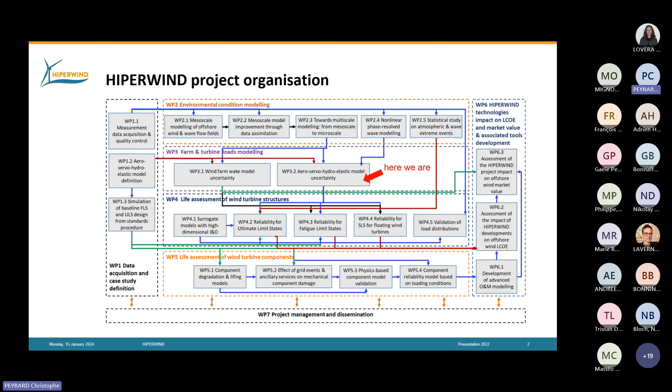On my side, I'm going to talk about several components of the uncertainty we can have on the wave loads applied on monopiles. My global idea is to focus on the DEL, the damage equivalent load, rather than the ultimate load, so the study will be very fatigue-specific. I'm going to talk about three main sources of uncertainty.

The first one is about the geometry of the monopiles, because we have the transition piece that makes the connection between the pile and the turbine, and usually this piece has a larger diameter than the pile itself. This can introduce geometrical variations that will change the loads, especially considering the hypotheses made in the design models.

Then I will briefly talk about the nonlinear loads applied on monopiles, focusing on the high frequency loads that are most involved in fatigue, because they correspond to a lot of cycles. And then I will give a brief word about the stretching models, which are one of the sources of uncertainty in the loadings on monopiles.

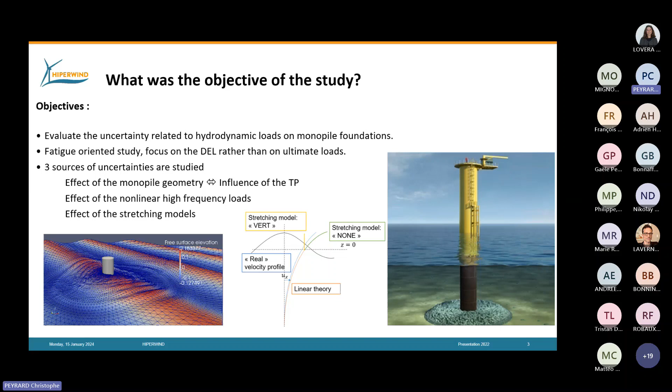So what we are going to discuss today - I didn't know exactly who would participate, so I have some introductory slides about the theory I will discuss today.

The first thing I will discuss is strip theory, maybe the most used theory when trying to describe wave loads on monopiles. The idea is to cut the monopile into segments on which we can compute loads based on the wave kinematics using a formula. Probably the most known formula is the Morison formula.

For monopiles in the offshore wind industry, we have this MacCamy-Fuchs correction that helps account for high loads on monopiles due to short waves. So basically, what will be applied in this presentation as strip theory is a Morison formula corrected by the MacCamy-Fuchs method, and we will not consider the drag loads. So we'll have a force directly proportional to the acceleration, and this inertia coefficient, Cm, will not be taken as 2 like we do in the Morison equation.

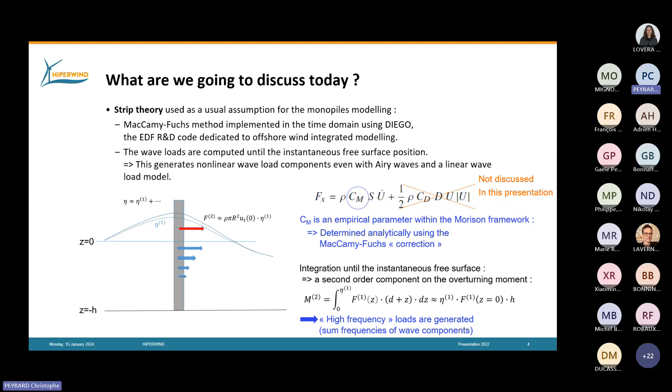Since I didn't know exactly how familiar you are with this idea of second order wave loads, I took an example from Bernard Molin's book, which is very nice for second order load analysis. It's explained that if you have just a free surface elevation that is regular and linear, a cosine function with an amplitude half the wave height, the force produced by a second order model will have a component at the wave frequency in the horizontal force, and also a component at twice this wave frequency.

So this is what I will call high frequency loads today. These are loads produced not in the wave spectrum itself, but associated with a combination of several wave components producing double frequency or sum frequency loads. Even if these loads are smaller, since they are associated with a higher number of cycles, they can produce a contribution to the damage equivalent loads.

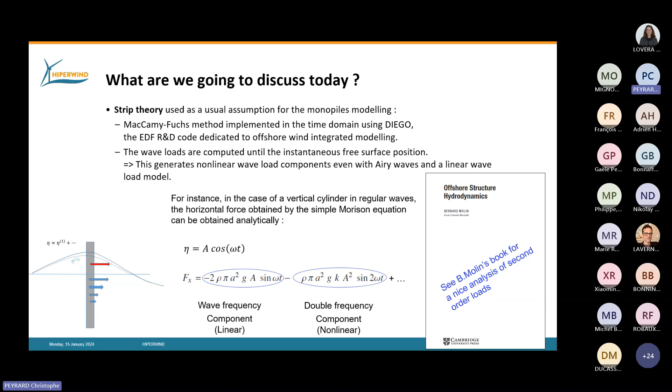So this is the first family of models that we will discuss, the strip theory. And the other one is the potential flow models, for which the wave forces are not obtained by associating coefficients to wave kinematics, but are computed directly by pressure integration on a mesh of the monopile in that case.

So from the very general problem that we have here on the left of the slide - and I promise it will be the only slide with a lot of equations, after that I will try to have something more easy to read - we have a description of the wave pressure using the potential and the hydrostatic components, giving us a problem that we can solve in the fluid.

So the fluid is assumed fully nonlinear. The free surface is not something very flat like we have on this picture, but we have crest and trough. We have boundary conditions on this moving boundary, and it's possible to solve this problem in a fully nonlinear way, but it's very costly.

So what is done in the industry, mostly in oil and gas and for floating wind turbines, is that we try to solve this very general potential flow problem at first order in order to derive forces at the wave frequency. It's also possible to solve this problem at second order in order to access the nonlinear wave loads that I talked about before.

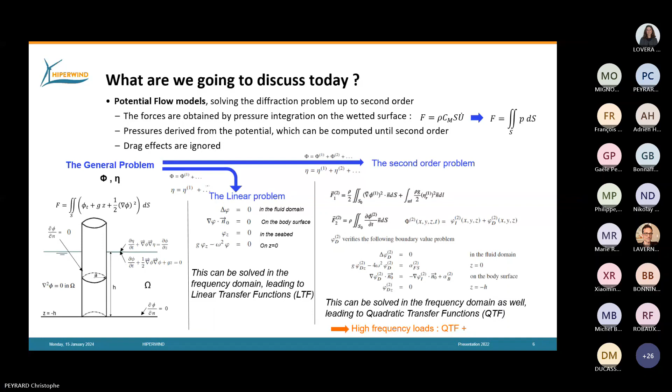So trying to go more in depth into the program of today: I will start by giving you the framework of the study with the cases we have investigated, the methods and codes we have used, and the kind of output I wish to present in the rest of the presentation. Then I will have 5 slides about the effect of the transition piece on the wave load, then 5 slides comparing the wave loads predicted by potential flow versus the strip theory model, and then 2 slides about stretching models and the conclusion.

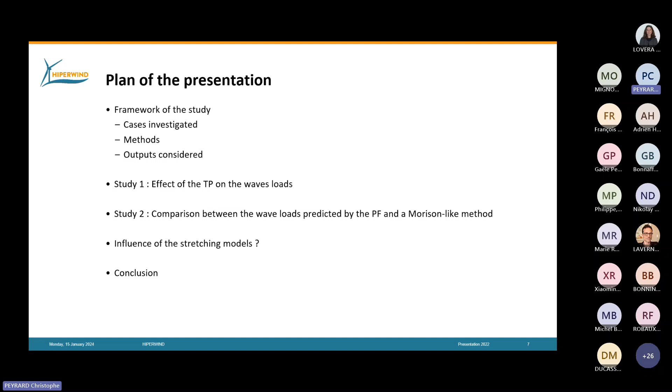So moving to the cases we have investigated. On the left part of the slide, you have an idea of the scatter diagram that we have used for this study. It's an Hs-Tp scatter diagram taken from the Teesside farm.

It's a farm operated offshore the UK by EDF Renewables. It was not possible to give you exact values, so you just have a plot. Basically, the most common wave conditions are in red and pink, and less typical conditions in orange, yellow, and green. So we have a lot of small waves, but over a large range of periods. We have HS until 6-7 meters. We will consider this for the fatigue study.

So this was for the sea conditions. In terms of study, we'll first look at the effect of the TP geometry on the prediction of wave loads using the MacCamy-Fuchs corrections. For that, we'll use the strip theory and the potential flow approach, and both will be linearized. We'll have only linear components in this study.

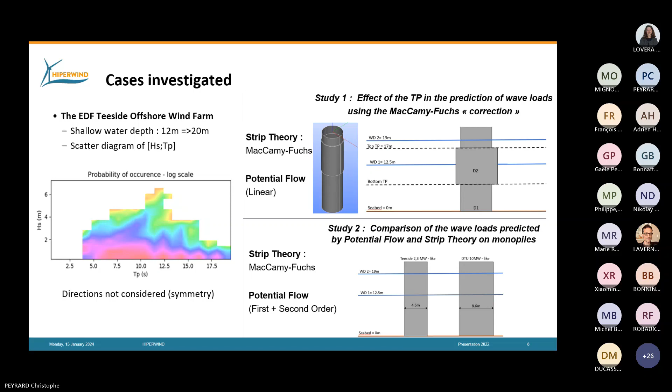Each segment will be submitted to a horizontal force that is only proportional to the acceleration. I recall here we did not consider the drag, so the force on the small segment is just given by the water density multiplied by the inertia coefficient, the section of the monopile, and the acceleration of the fluid, and of course the size of the segment.

And we apply this MacCamy-Fuchs correction, usually done for a purely vertical cylinder with no diameter variation, to a cylinder that has two diameters. As is done in several codes for the design of monopiles, we consider the diameter at the free surface position to compute this inertia coefficient.

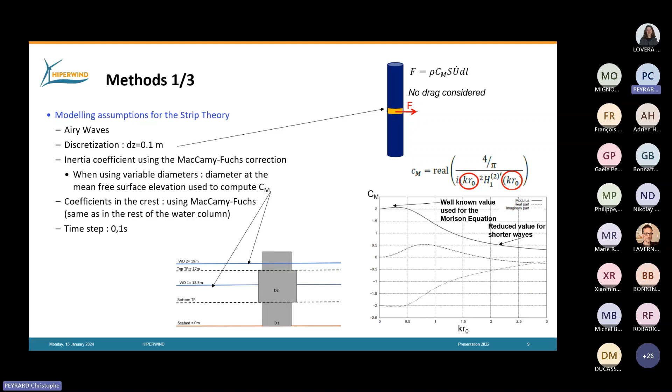In terms of reference, when dealing with variable diameter cylinders, we use a diffraction radiation solver as reference. We have used Nemoh, which is open source and free software developed by École Centrale de Nantes. It's really easy to use, and I encourage you to try it - it's a very good tool. We can just input to Nemoh half the monopile mesh, and Nemoh will compute the full wave loads applied on the monopile.

So the incident waves and the diffracted waves are computed by the software, and the local pressure on every panel you can see here is computed. After that, the software makes the integration of the pressures and gives the global force.

So this will be our reference, because this is a kind of tool made to deal with these, let's say, complex geometries, at least less simple ones. And we compared that with a strip theory.

Our base case will be two water depths that are observed at Teesside: a quite low water depth of 12.5 meters, and a larger water depth of 19 meters. The idea is that when the water depth is low, we have D2 crossing the free surface, so we use the large diameter to compute the inertia coefficient. And when the water depth is high, we have the small diameter crossing the free surface, so we use the small diameter to compute the inertia coefficient.

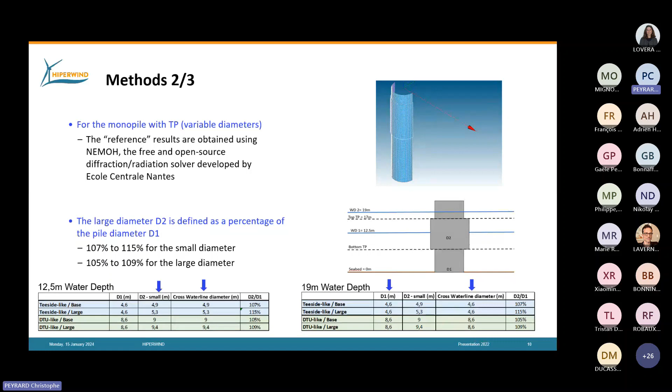Last section for the methods concerns the high frequency load, the sum frequency that I mentioned before. For that, as we were working with very simple geometries, basically just vertical cylinders, we were able to just use analytical or semi-analytical formulas. So for the linear forces, we use the MacCamy and Fuchs analytical solution, implemented in Python by Arsène Amoureux at EDF.

For the second order wave load, the QTF, quadratic transfer function, we compute it using a semi-analytical Python script developed by Elie Rongé. For both these tools, we made a validation.

For the linear side, we compare the MacCamy-Fuchs correction formula to a Nemoh first order solution with good accuracy. And for the second order script, we compare the prediction of the Python code with the article by Kim and Yue. We implemented the method given in their article and compared our results with theirs, with very good agreement, meaning these codes are, let's say, validated.

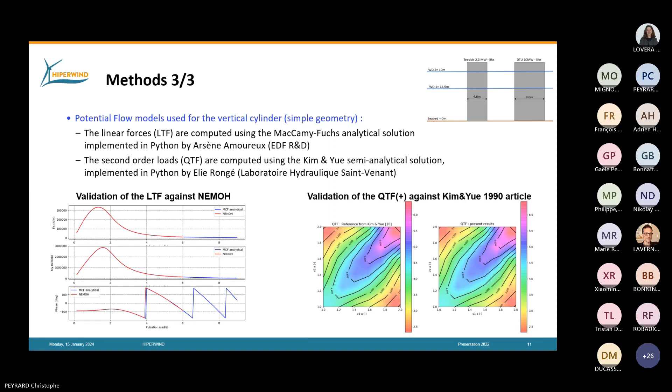Okay, now I would like to talk about the output I will present. As I said before, the study is very focused on fatigue, so I will present damage equivalent load maps.

You have an example here at the bottom of the slide on the left side. The idea is that for each Hs-Tp pair that we have in the scatter diagram, we compute time series of the overturning moment due to the waves, and then we compute a damage equivalent load from this time series using rainflow counting.

We do that 3 times for 1 hour sea states. We take the mean value of this damage equivalent load, and we have 1 point of the DEL map. If we do that for all the points of the scatter diagram, we obtain this DEL map. So it's a synthetic way to present where the damage equivalent load is high and where it is low.

What I will mostly focus on is a ratio of DEL maps. Usually we don't just want to have this DEL map, we want to compare 2 models. So we'll have maps, DEL ratio maps, like we have on the right side of the slide here, that just present the ratio between the DEL of 2 models.

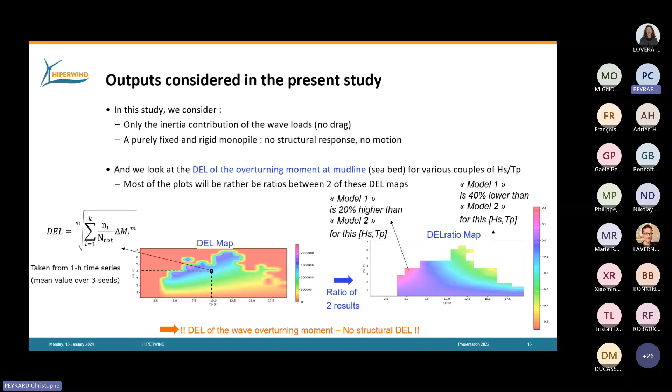Okay, so let's now move to study 1: the effect of having a variable diameter on our monopiles. Here we compare the linear strip theory to the linear potential flow given by Nemoh.

We have the relative error on the DEL, so the ratio here, and we see that basically we have only positive values, meaning the strip theory is always higher than the linear potential flow — we find a higher damage equivalent load using the strip theory than what we would have with a potential flow method.

We are conservative using strip theory, with differences in the order of some percent and very low variation with HS, which is logical and expected for a linear model. But we have variation depending on the TP, with more differences for large TPs and smaller differences for small TPs, meaning that the kinematics associated with small TPs probably does not penetrate much into the water column. Most of the loads are applied on the large diameter side.

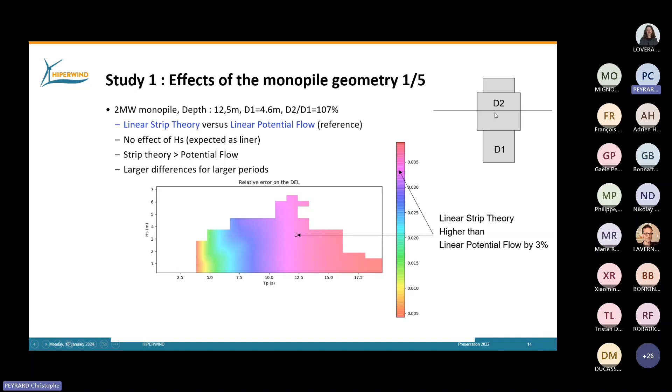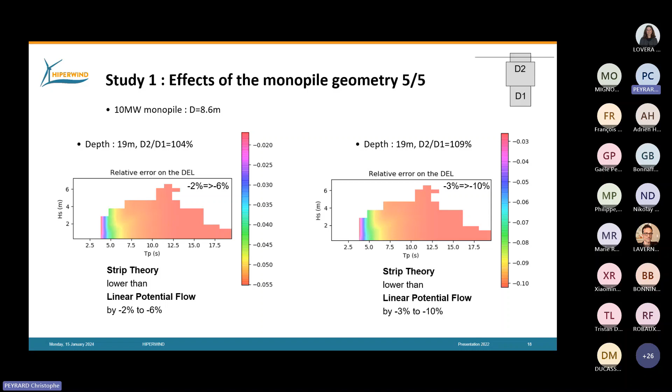This was for the small monopile, the 2 megawatt monopile. If we move to the 10 megawatt monopile, this effect is a bit reduced, with 2 to 6% reduction of the load using strip theory compared to potential flow. Moving to the bigger ratio D2 over D1, so a bigger transition piece, we have 3 to 10% differences. We still have this very homogeneous response with no influence of HS on the response, so larger monopiles are maybe less affected by this change in diameter than small monopiles.

Now I move to the second study, on the high frequency loads, the sum frequency. This was just to explain a bit what I will discuss later.

Here we have the QTF matrix, the quadratic transfer function matrix. For example, looking at this top left QTF plot, if I combine waves of 3 radians per second with 1 radian per second frequency, I am able, both with strip theory and potential flow method, to determine the amplitude of the force produced when combining these two frequencies. Doing that for any couple of frequencies gives this kind of matrix plot, showing for any couple the level of force expected from the wave field. The top matrix is associated with strip theory, and it's pretty homogeneous with little variation. At the bottom, we have the prediction of the potential flow method, expected to be more accurate, and we see more variation here, particularly for high frequency, with strong oscillations that we don't see with strip theory.

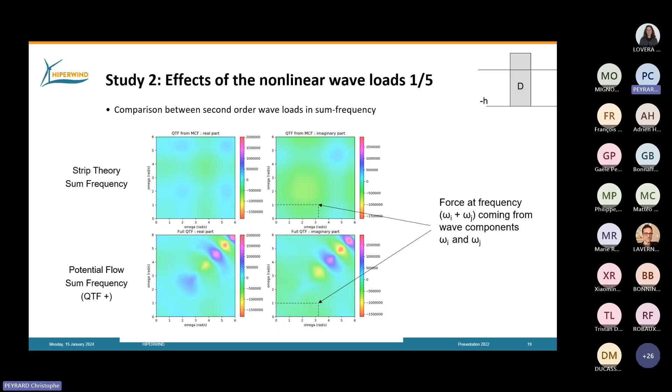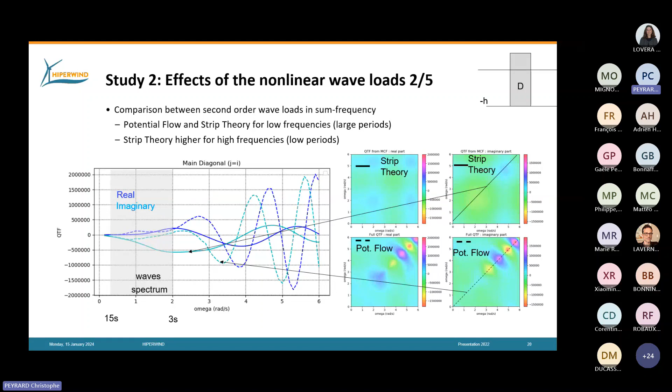Okay, so we have some differences, and we'll see if we see them in the DEL predictions.

If we apply these two methods to the small monopile, the 2 megawatt monopile, we see that for short waves, typically TP between 3 and 10 seconds, we have an overestimation of approximately 20% by the strip theory as compared to the potential flow. When we move to longer waves, we have almost no differences between the two methods.

What we also see on this graph, as compared to the graph before, is that we have a variation of the DEL both with the TP and with the HS, because now the problem is non-linear, so we can expect different behavior for large HS and small HS.

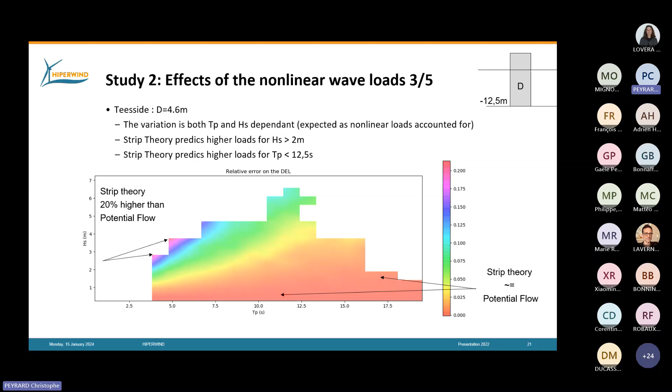Okay, I'll try to be short. Here it's a comparison between two diameters of monopiles, and we see that we have pretty much the same behavior. The strip theory still produces higher DEL for short waves and almost no differences for long periods. It seems the difference between the models is a bit more pronounced for larger diameters.

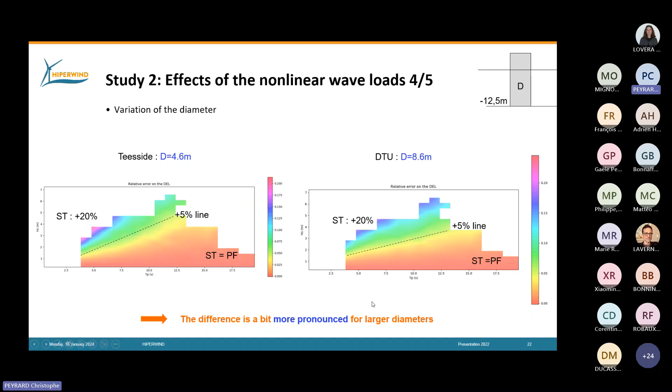If we move now to a modification of the water depth, we have on the left part the prediction for the small monopile in 12 meter water depth, and on the right side in 19 meter water depth. We see that we have less difference between the strip theory and the potential flow method for the large water depths as compared to the small water depths.

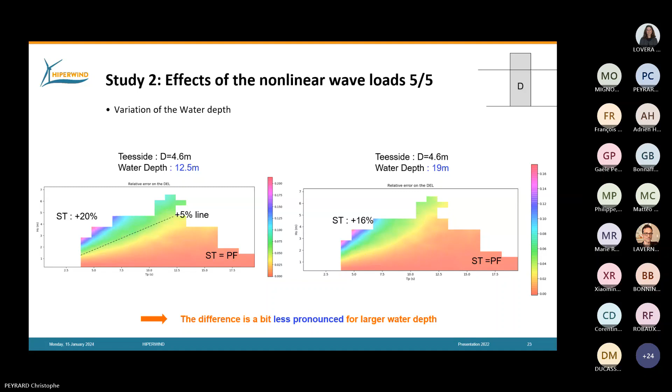Now I have two slides on the stretching models. For those who are not familiar with stretching models, it's a way to compute the kinematics in the wave crest, in particular for irregular sea states. It's quite important to avoid overshooting the kinematics.

Basically, the idea is that if linear theory predicts the orange curve here, in reality what we would observe in the field would be something a bit lower than this kinematics, noted as the real velocity profile in blue. We'll have a bigger and bigger difference as we go to the crest of the wave. Even if we have something quite correct in the water column, when going to the crest, if we do not correct the kinematics with a stretching model, we will have accelerations and loads that are too large.

There are plenty of stretching models that have been developed in the literature. What was presented used the vertical stretching model, meaning we follow linear theory, and when we go into the crest, we consider the kinematics there to be the same as the kinematics at the mean surface level. But it is not the most common stretching model.

We have other stretching models that are more commonly used in code, such as Wheeler stretching and Wheeler plus stretching. The idea of these models is to avoid this overshoot in the kinematics by changing the vertical scaling a bit. For linear theory, when we reach the mean sea level, we have a ratio of 1, meaning the kinematics is given just by the amplitude of the waves, the wavelength, and the wave period.

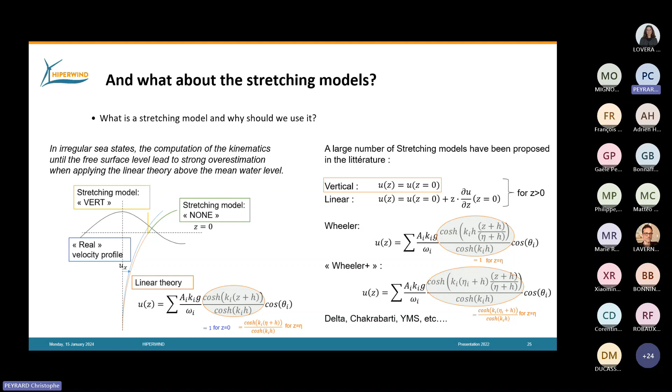So it's a way to try to capture better the kinematics. And moving to the results, we observe here that the stretching models have kind of the same features as what we have seen for the nonlinear wave loads. So mostly an effect on the small period, and less differences for the high period, and mostly an effect for the large waves, and no effect for the small waves.

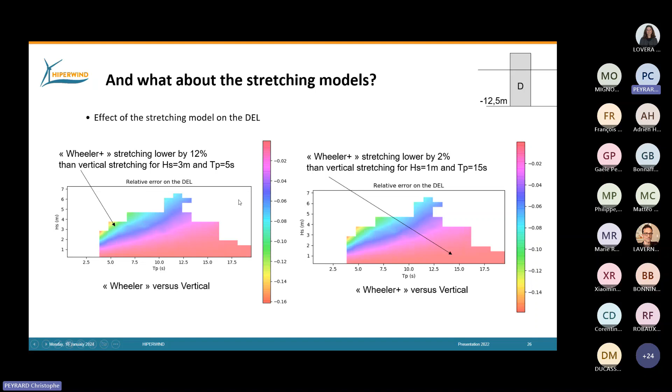And it seems like the Wheeler plus and the Wheeler stretching are producing a lower DEL than the vertical stretching, which was pretty expected because they are reducing the kinematics, so they are reducing the loads. And the typical order of magnitude is between 0% here to, let's say, 15% for the shortest and biggest waves. So quite similar to what we have seen before.

So I move now to the conclusion. For my conclusion, I will talk about global DEL. So for now, we had a DEL map with this quantity plotted for any HS-TP couple. When I talk about global DEL, I multiply the DEL by the probability of occurrence of HS and TP, and so I obtain a global increase or decrease of the fatigue damage.

So what we have seen is that for the TP, the variation of geometry of the monopiles due to the transition piece, the strip theory varies from -7% to +2% with respect to the potential flow. So globally, we have a tendency to underestimate a bit the loads in most of the cases.

Regarding the second order wave load, so the high frequency wave load, it seems like the strip theory is producing a higher damage equivalent load on a large range of wave periods. So this leads to approximately 8% of additional damage equivalent load for the case we have seen here. So on the Teesside farm, it's for sure site dependent, but on our case it was 8%.

And when we move to a small pile diameter to a larger pile diameter, we move to 8 to 10% difference. So it seems like the bigger the monopile, the bigger the difference, which is quite intuitive again, because we have more and more diffraction effect when we move to larger pile diameter. But here it's quantified for the project.

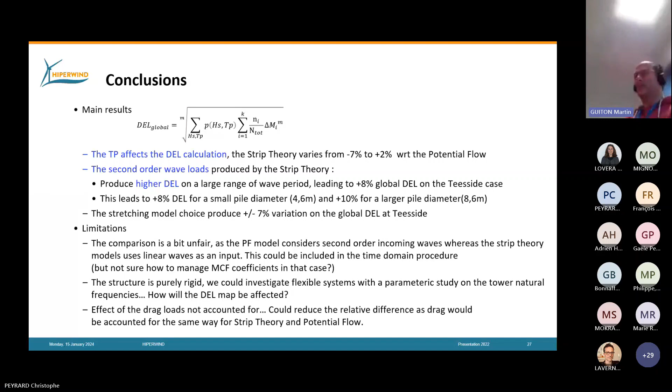Thank you, Christophe, because it's an important result of the Hiperwind project, and you clearly shown some significant changes, I will say significant approximations that are introduced by the strip theory of MCF, including some non-conservative one. So I think this may be of interest for the people who are connected and people that are working on design specifically.

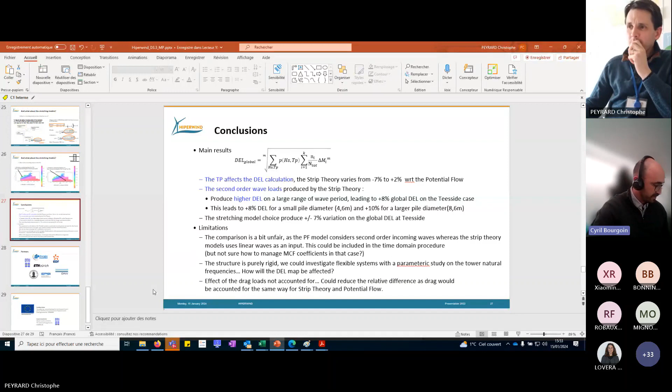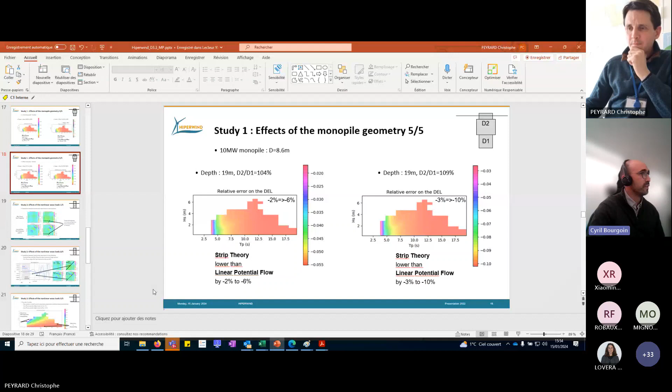I may have one question regarding the way you are considering the periods for the hydrodynamic database. Could you give us an idea of the lowest period you used or considered when calculating the loads from the diffraction and radiation contributions? How low did you go in your NEMOH calculations in terms of periods?

Yes, I went until 0.05 radians per second, which would correspond to considering 120 seconds as a period.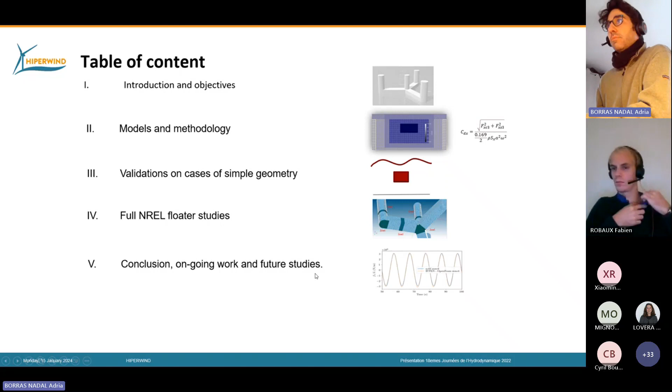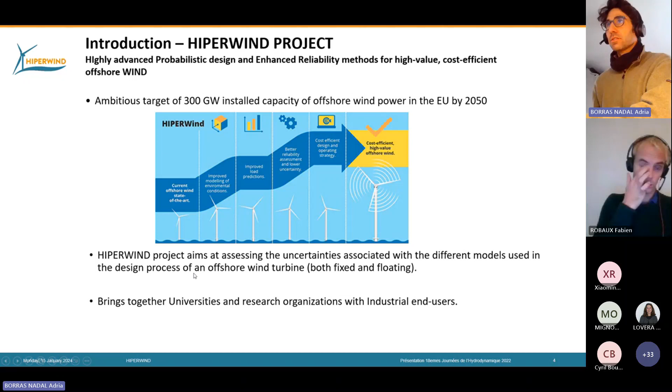But before seeing all those details, maybe it's important to introduce the topic. So the Hiperwind project, you already know, Martin presented it at the beginning of the webinar. We have performed this work on this project, which is an H2020 Research and Innovation Program project.

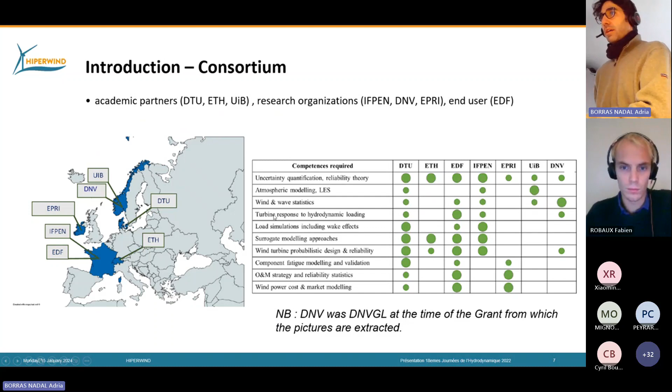The partners, and this introduction, maybe we can keep it brief. It's interesting to see the academic partners and research organizations. This slide also shows the competencies and what we have performed in this study, EDF and IFPEN, so we see here the load simulations and the hydrodynamic loading. So we are in this topic.

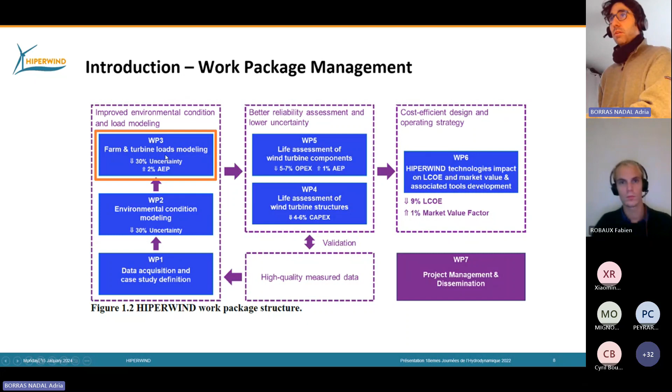Again, we have this organization of work packages. So we are here, as Christophe presented before, the farm and turbine load modeling work package. To focus on today's work package 3, we had a lot of topics to deal with, but the focus of today, as we said, is section 3.2, more specifically this orange line here on floating. So the main particularity of the topic is that it was really focused on the floating problematic.

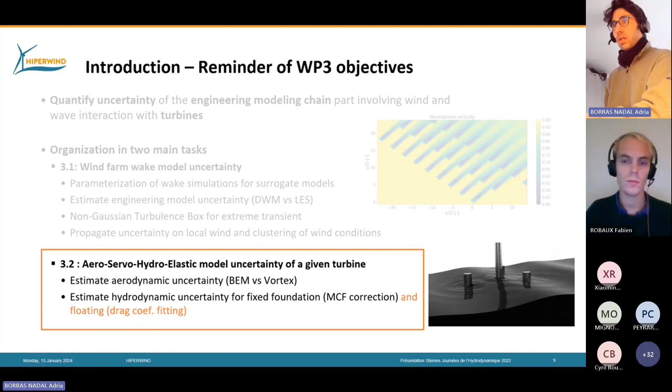So what about hydrodynamics in FOWT design? I think it's always important to introduce the topic and remind some key elements of seakeeping.

I think it's really interesting to see a bit this introduction, this slide, because it's important to be aware that the state of the art is directly coming from oil and gas industry methodologies.

So what we find, if we want to apply it to FOWT, I think it's interesting to see that the people of floating wind turbine industry for the moment is still really focused on those methods, which are based on two main theories: the potential flow theory applied for so-called large bodies. By large bodies, we mean we model the diffraction effects when the body is really important compared to the amplitude of the incoming wave.

Here the flow separation effect will not be so dominant, but the second aspect is when this flow separation effect is more important, so the current methods will use the Morison empirical formula. Christophe introduced a bit this formula before.

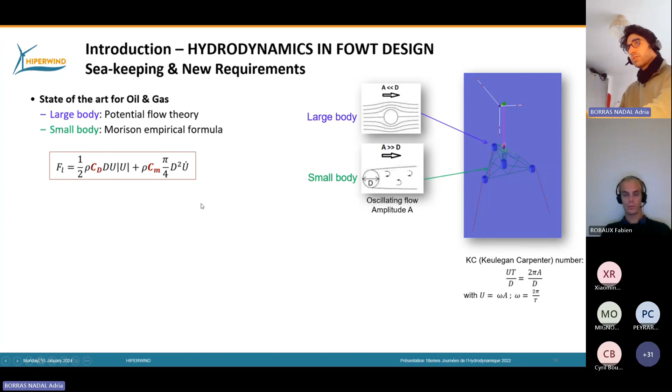So we can consider this small body theory as an empirical one, where we define the loads, the forces, that we have to express in two terms: a drag dominant term with a drag coefficient to fit, and an inertia dominant term. So I think what's interesting here is to see that that's directly coming from oil and gas.

But it's really important to ask ourselves if for marine renewable energy that's convenient or not. I think we're all aware that we have more economic constraints and less safety constraints, and we really want to design our floating structures better than the past oil and gas topic did.

So it's really important, I think, to see a bit the methodologies and to ask ourselves about the current limitations. Of course we can ask about the validity or accuracy of the tables that people use to fix those coefficients, because we're in an empirical formula, so those coefficients have to be determined, also considering different motion periods, different waves, different platform sizes.

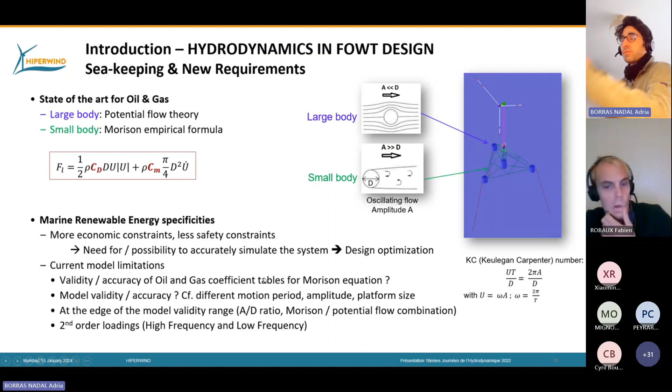I think it's really different on this new topic. The platforms can be really different, and it's interesting to ask a bit about the methodologies that we have used during those 30 years or something like that.

So another way to see that, as I said before, is that those classical methodologies are mainly focused on linear potential flow models. If you want to take the viscous effects of flow separation into account, then we use this Morison formula that I presented. And I think we can maybe see if those tuned coefficients are still valid when working on floating structures.

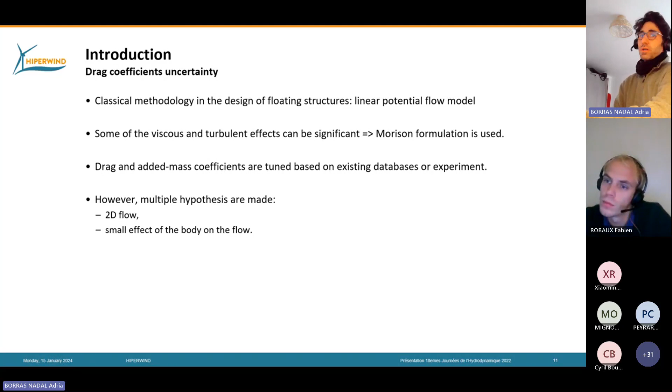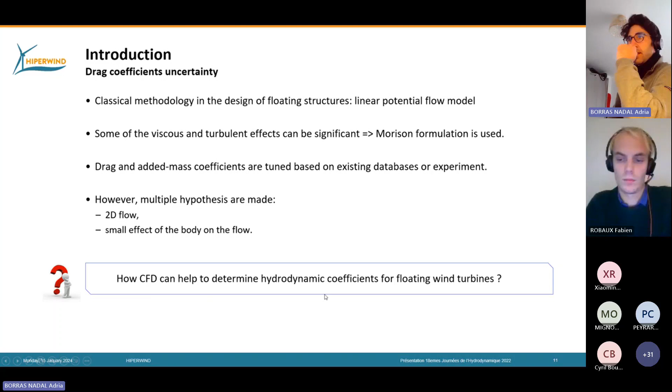So the main question here is how CFD can help to determine hydrodynamic coefficients for floating wind turbines, and that's the focus of the presentation of today that we will present with Fabien. So it's really 100% CFD focused.

Let's talk now about models and methodologies. During this project we have performed numerical wave tank simulations. So we talk about CFD numerical wave tanks and how they can help calibrate empirical coefficients for engineering tools, those aero-servo-hydroelastic tools that we talked about before.

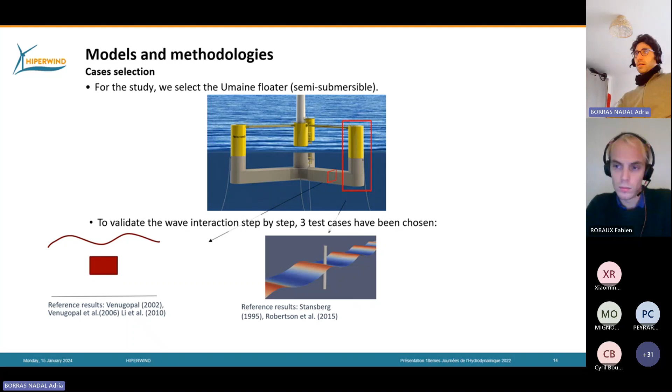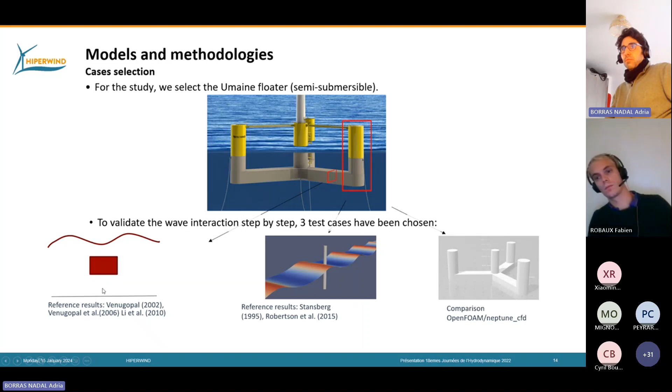So the first one is focused on the pontoon here in 2D, to be more simple, and to increase the complexity we have also studied separately a case of a cylinder piercing the surface. At the end we have made the comparison between both codes in the full floater, because at this stage we did not have experimental data on the full floater. So it was interesting for us to separate the problem and be able to compare our methodology with the experiments. Just before that, let Fabien introduce the rest of the presentation.

A few words about the tools. So we have used two different tools. Fabien has used Neptune CFD, developed by EDF, and on the IFPEN side, I have used OpenFOAM.

In our case at IFPEN, with OpenFOAM we have used the waves2Foam libraries. Maybe Fabien will detail a bit more on the Neptune CFD particularities, but of course on OpenFOAM it's quite a classic approach because it's a really used open source toolbox, with a VOF system and mules to track the free surface. To mesh, we have used snappy hex mesh to fit the body.

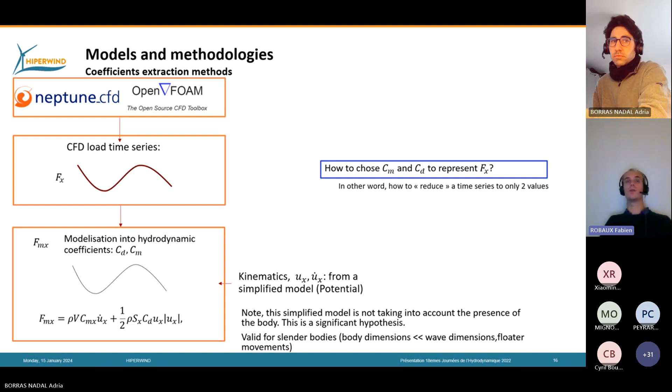For that, there are multiple methods that I will present in the next slide. But just on this slide, what's important is that you reduce the complexity of your problem from a time series to only two parameters. By doing so, you introduce hypotheses, of course, because you lose a lot of degrees of freedom. The main hypothesis is the Morison hypothesis, which means that the body dimension should be very small compared to the wave dimension, and that's it basically. This hypothesis comes from the fact that the body should not have a large influence on the wave kinematics.

So on the top of this slide, you have a reminder of the previous one, and you can see that there are many methods to obtain those two coefficients. The first one is to try to minimize the error by comparing the time series to the reconstruction. So you have two variables that you can change to minimize this L2 error, E. You can see in more detail, either in the reports on the Hiperwind website or in the article by Venugopal, the equations to obtain CM and CD from this method.

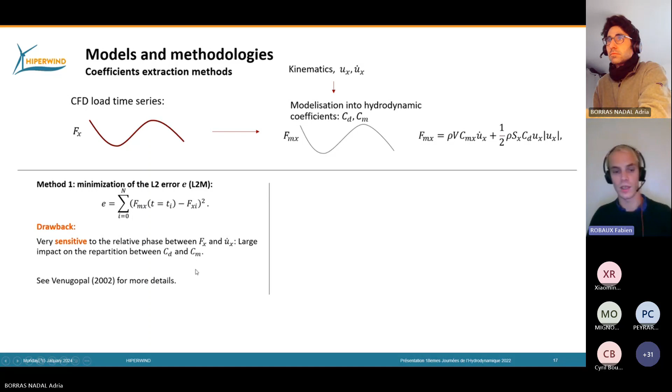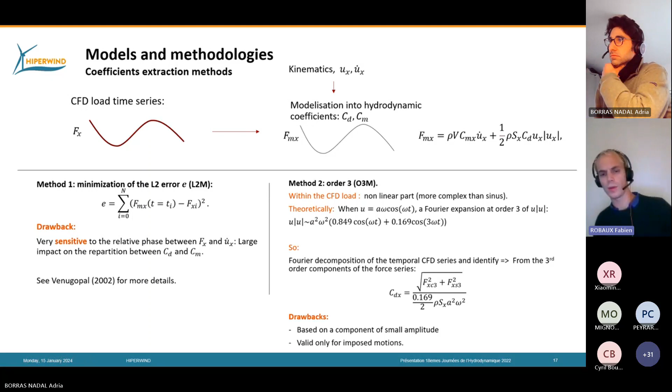We performed this also on the IFPEN side, during a PhD study, and it was similar to Venugopal. And the other method is an extension from a method coming from Array, which is a relatively old method. Basically, it comes from the fact that within the CFD load, you have a nonlinear part, meaning that it's not just a sinus, but a sinus plus something of higher order.

In theory, when you impose a movement U as a cosine, you will have, in the expression of the Morison model, a part that is nonlinear due to the UX times absolute value of UX. If you do the limited development of that, you will have small terms in 3 omega, of frequency 3 omega. You can compare what you obtain when you do the Fourier transform of the CFD load to the values in the 3 omega part. In that case, you can deduce what the CD is by looking just at the amplitude of the third order load that you obtain.

The great thing about this method is that it doesn't rely on any phasing between the load and the kinematics. But the drawback is that it's based on a very small amplitude, like 16% of the total magnitude, something like that, and it's only valid for imposed motion.

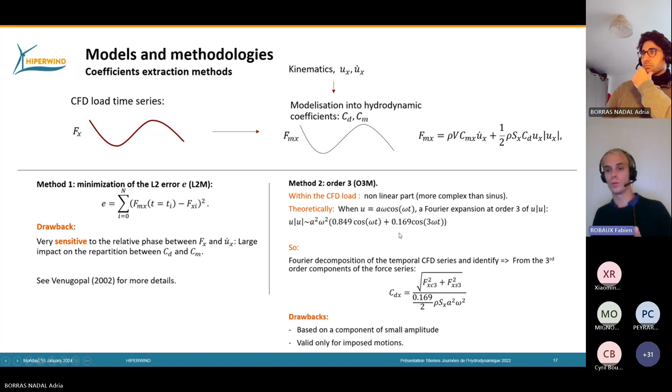Why is it only valid for imposed motion? It's because you have to impose a linear motion and get the non-linear part of the effort. If at the beginning you impose non-linear kinematics, for example when you give wave to the model, you will have a non-linear part. So at the end, the non-linear part of the effort will both be the non-linear part due to the fact that there is non-linearity in the load, but also coming from the non-linearity of the wave itself. And it's difficult to identify which one is which, basically.

So the first case, as Andrea said, is a simple 2D rectangular cylinder that represents the pontoon. Note that this pontoon is made at the scale of the UMaine floater, which is not exactly the same as the scale of the Venugopal case, but it's really, really close. For example, in the Venugopal study, the aspect ratio is exactly 0.5. In our study, it's 0.56.

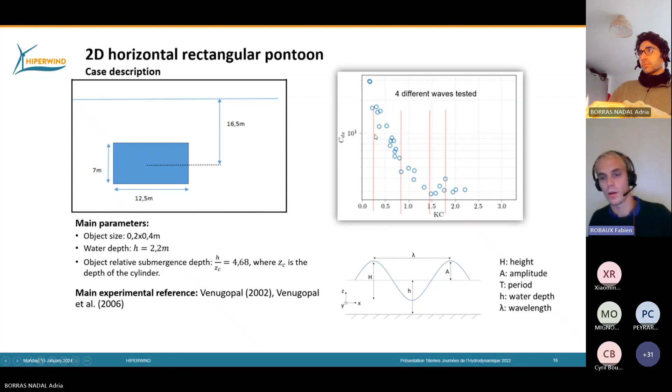We have tested 4 different waves, so that we get a representation of the CD with respect to the value of KC.

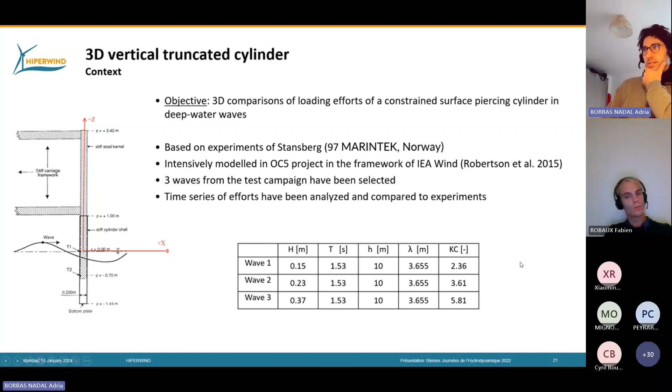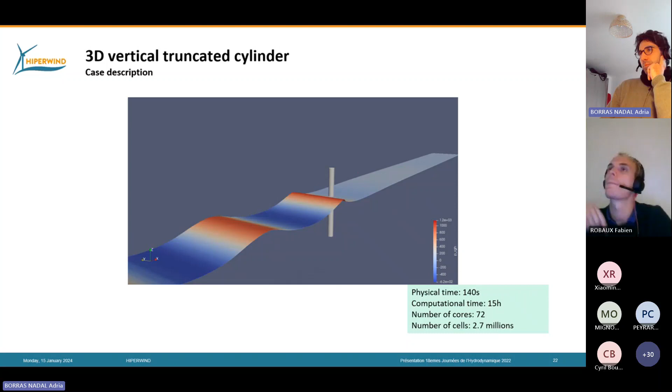So here it's an overview of the simulation. That's exactly a simulation performed during the PhD. I think this video was not made for myself. It was made by Constance Clément, that I can thank, because we have made a lot of work that we have used during the HIPERWIND project during the PhD of Constance.

But here we have selected different waves from the PhD. Here we have directly the results. So the 3 graphs that you see are the horizontal wave loads on the cylinder. Yeah, it's quite up.

It's the cylinder. It was for the before. Maybe confusing. So here it's the piercing cylinder.

So here we are looking at the horizontal wave loads of 3 different cases. The blue curve, it's called NREL, meaning the experimental one. The orange one is the simulation made by IFPEN with OpenFOAM, and the other solid lines are different tests of Neptune CFD. I think here what's important to see is that we have a good agreement between OpenFOAM and Neptune CFD, but also with experimental results.

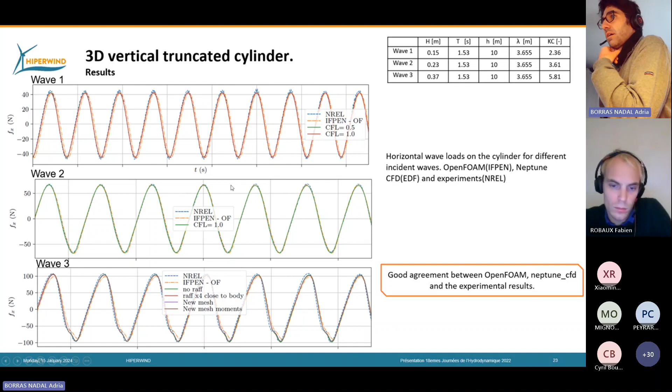So what's also interesting to see is that maybe in the 3rd wave we had a little bump that we encountered with the incident wave, which we have caught quite well. We have seen that depending on the mesh refinement we were able to catch the bump. But I think here the results were quite encouraging for the next step.

So the next step is the full floater. Maybe Fabien, you can go on. Yes, thanks Adria. So because the goal is to get the CD and CM on the full floater, because it's what is used in the engineering,

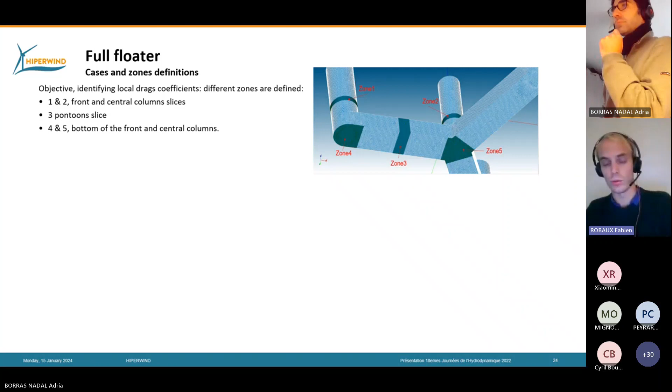mostly during the design part, we define different zones of the floater, and we choose CD and CM for those different zones. What we are going to do is exactly the same thing: define different zones and try to fit a CD and a CM on those zones. For that, we have studied 3 different benchmark cases.

The first one is an incident wave of period 10 seconds and wave height 6 meters. The second one is a forced sway motion, so we impose the body to move along the y-axis in a period of 10 seconds and amplitude 3 meters. The goal is to get roughly the same KC in all the cases.

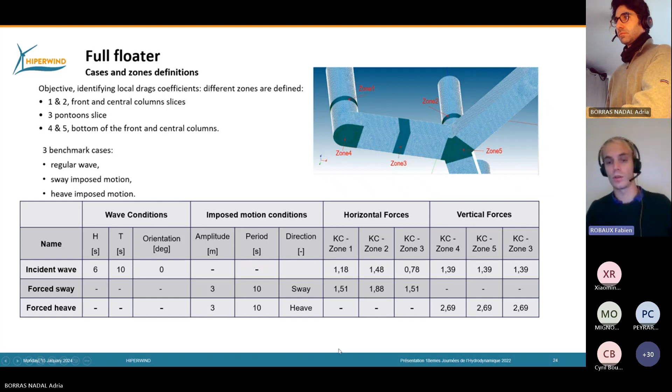And the last one is a forced heave motion, so vertical displacement. Of course, loads won't be the same in the different zones. For example, on zone 4 and zone 5, the load will be almost null in a sway motion, but will be relatively important in heave motion.

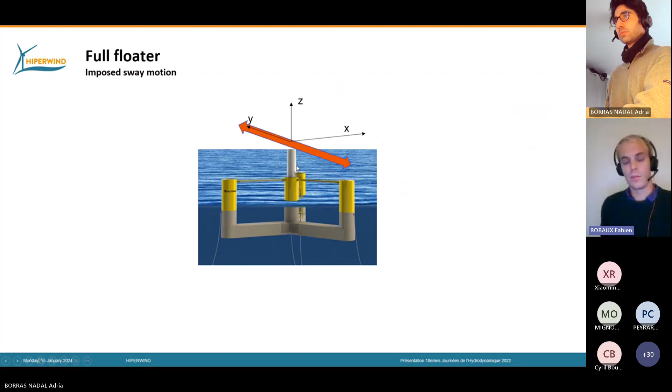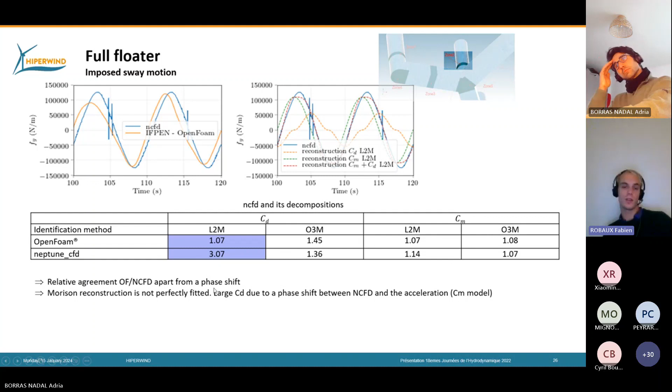So the conclusion on this slide is that given the method, even if we have very close time series, a small phase shift can have a large impact on the obtained drag coefficients.

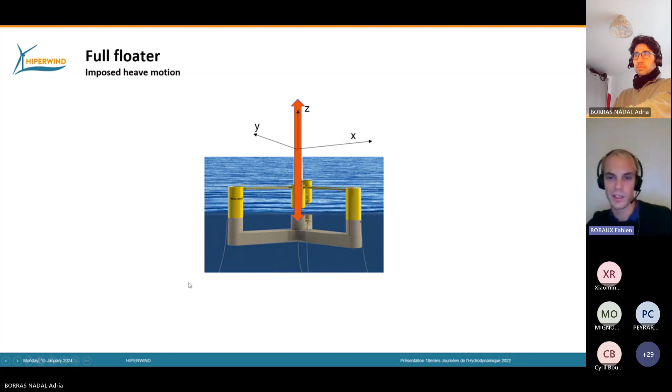So for the heave, also, same problem, we're going to accelerate. Just try to conclude because you have two questions already in the chat, so let's leave time for questions. We cannot skip the video.

No, I'm joking. So there is a vertical motion imposed on this one, and we compare on zone 3. We basically have the same results.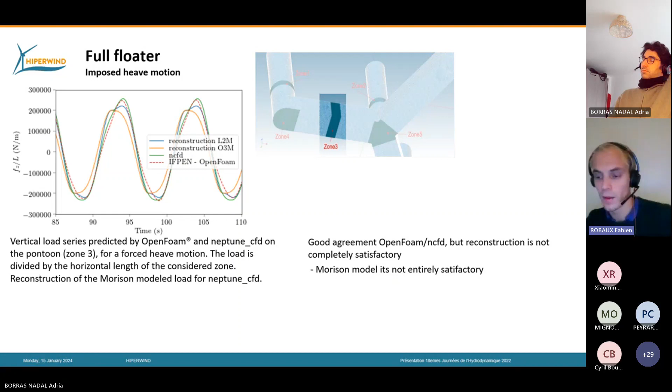We have very close time series between Neptune and OpenFOAM, but the reconstruction might not be completely satisfactory, and it's assumed that it is due to the Morison hypothesis, that the body should be small compared to the movement, and that it was derived for 2D effects. We tried to apply it in a completely 3D case, and we think it's not possible to completely say that the 3D effects are negligible in this complex 3D case.

Yeah, so I'm going to pass this slide because it's basically the same conclusion.

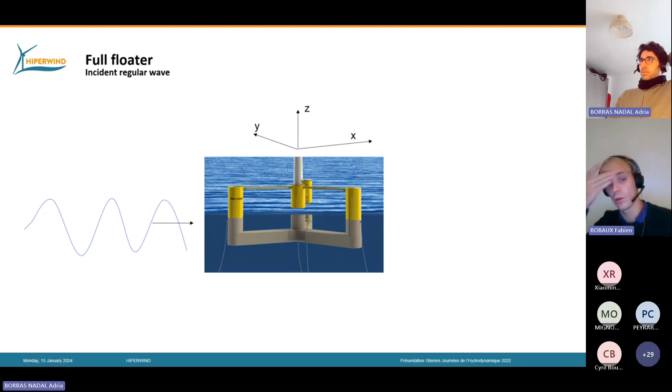And the last benchmark case is an incident regular wave on the full floater, and we have a video as well that we can't pass. No, that's the result of all the work.

So on this case, if you remember correctly, we cannot use the O3 method because we have nonlinearity that is contained in the incident wave. So we only compare the L2 method there.

And we can see that even though we again have a very good agreement between IFPEN and NCFD, we do have drag coefficients that can be quite different for the different zones that we consider. And note that the Nemoh case, which is in green there, cannot represent any drag effect because it's in the theory of the first order potential flow.

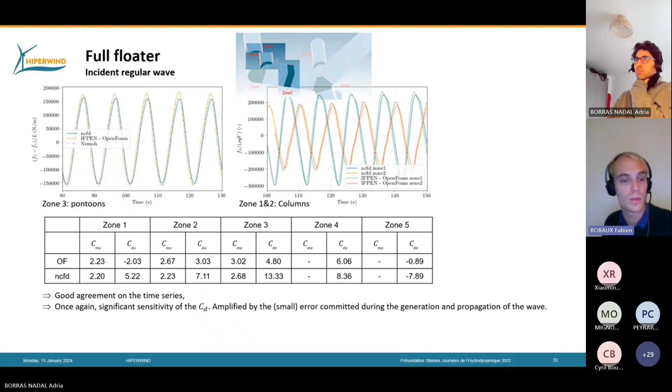So the drag effect is contained in the phase shift between the Nemoh curve and, for example, the NCFD curve. So even though the phase shift is very small, this small phase shift contains all the CD, which means that we once again have a large sensitivity of the CD to any kind of small errors we could have in the simulation.

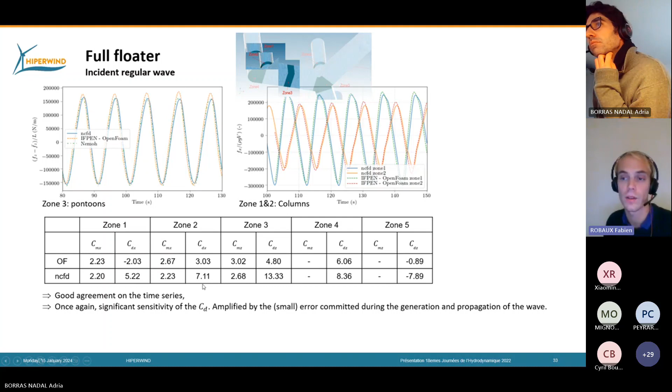Yeah, so I'm going to let Adria conclude. Yeah, sorry, it's a bit fast, but maybe we can take one or two questions.

But I think, to conclude, we have seen an agreement between the time series on the loads between two CFD codes. We have made this step-by-step methodology with simple geometries where we have seen that the CD is correctly captured, so that's a good thing. But we also see that the Morison model does not always correctly fit the obtained time series.

So as Fabien said, we have identified two main reasons: the CD determination is very sensitive to the phase shift with the classical method of least square error, and the 3D and diffraction effects cannot be accounted for. So that's also a Morison formulation limitation.

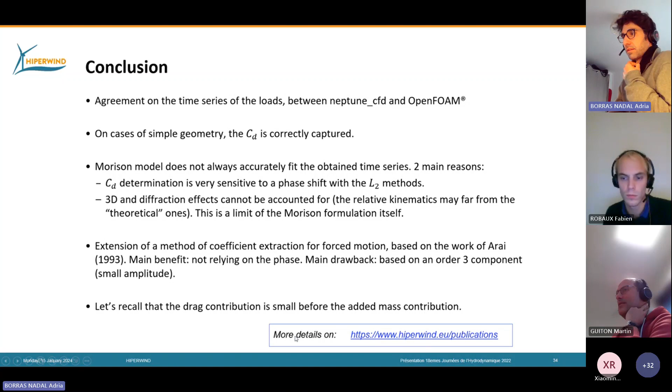So then I think an interesting point was also this extension of a method that Fabien has developed during the study, for extraction of coefficients that can be used for forced motion. And we can recall also that the drag contribution is small before the added mass contribution. So I think it's also interesting to remind that the report has more information.

Sorry, maybe I will interrupt you, no problem. So yeah, and people can read. You can put the slide before if you want. We had time, but not so long, so I apologize for the extra long time, including mine at the beginning.

Yes, in slide 20, if I remember correctly, it's the Venugopal experiment. And because it's under incident wave, we use the L2 method because the other methods I've presented to extract the coefficient cannot be used in case of incident wave. So we use the L2 method, which comes from the paper of Venugopal. The only difference is the least square method that we have written on IFPEN side or EDF side. We can have slight differences, but we see it's really close, this purple against the red method.

Do you also know what is happening in the NCFD case at KC 1.75, with the green point? This point is obviously wrong, and it's probably due to the fact that the turbulence model is too high order, considering the coarse discretization we used in the mesh.

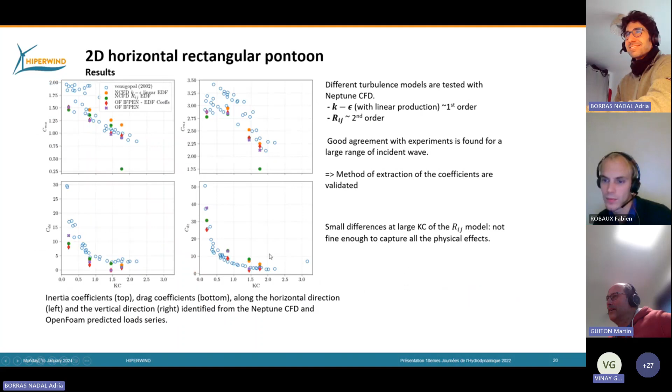Just to tell you I was involved in this kind of work a few years ago with Adria, but I'm still interested. I have a question, maybe for you, Fabien, about Neptune. Do you need to refine a bit more since you don't have the same strategy to take into account the solid? I'm wondering if you need to refine more compared to OpenFOAM to get the same accuracy in the end.

Actually, I do need to refine more, but not because of the different strategy for the solid, but because of the different strategy for the velocity. There is less model to represent the free surface. So when we use a multi-fluid approach, we usually need a finer mesh at the free surface interface. For the solid parts, it's less true, from what I remember. Okay, thank you, thanks for your question.

Just perhaps in terms of methodology, I'm wondering if you compared both CM extractions, because you perform both captive test on one side and forced oscillation also. In captive test, you get the inertia coefficient related to the wave excitation, but in the other case you catch the added mass coefficient, related to radiation. It's quite different. I performed such work on other topics for oil and gas before, and the main conclusion was that the relation between the inertia coefficient and added mass coefficient, CM equals CA plus 1, was not valid except for slender cylinders, and here we are far from a slender cylinder.

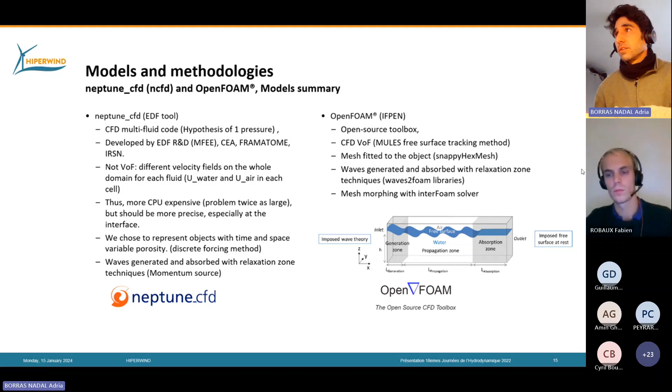Okay, so, but yeah, that's clearly a topic of interest. But in our case, to avoid this interesting topic you're mentioning, we have focused on fixed body. So, maybe we were not clear enough, but we have only performed, I think, this slide at the beginning - only captive test, imposed oscillation motion and incoming waves without motion, but not both.

But of course it's an interesting topic, and I don't know if there are some research solutions available. I think the OC7 project will deal with that later. But yeah, interesting question, I don't have the answer.